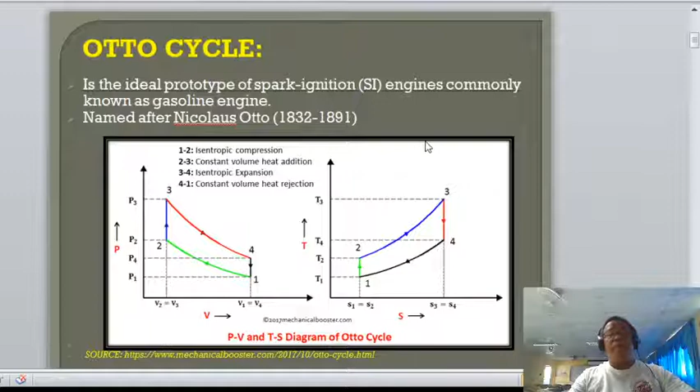Okay, let us now go to the analysis of the Otto cycle. If we consider the process involved between 1 and 2, that is isentropic, we'll notice that the equation for S equals C equals PV raised to K equals constant.

From the diagram, this PV raised to K equals constant can be written also as P sub 1, V sub 1 raised to K equals P sub 2, V sub 2 raised to K. Or rearranging the equation, P sub 2 over P sub 1 equals V sub 1 over V sub 2 raised to K.

But what is the term involved here for the ratio of V sub 1 and V sub 2? This is called the compression ratio, designated as RK. Substituting this RK into the above equation, we can easily determine the absolute pressure at the end of compression as a function of P sub 1, the absolute pressure at the suction condition, multiplied by the compression ratio raised to K, where K is the isentropic constant.

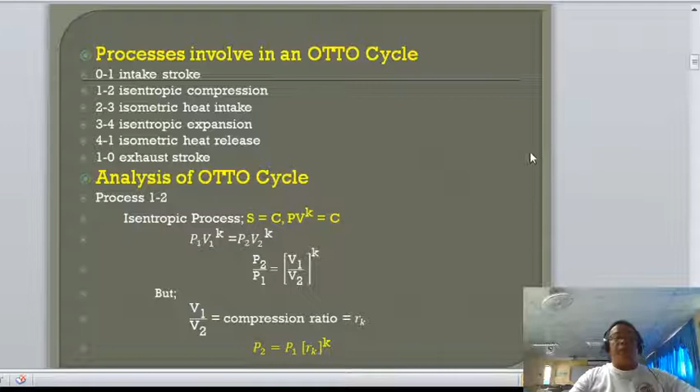Okay, so again, considering the ideal gas equation, or the combined ideal gas equation: P sub 1, V sub 1 over T sub 1 equals P sub 2, V sub 2 over T sub 2.

Getting now the value of V sub 1 over V sub 2, that is P sub 2 over P sub 1 times T sub 1 over T sub 2, and substituting from the original equation, we get the ratio of T sub 2 and T sub 1, that is T sub 2 over T sub 1 equals P2 over P1 raised to K minus 1 over K.

Another form for temperature in terms of compression ratio: T sub 2 over T sub 1 equals V sub 1 over V sub 2 raised to K minus 1, or simply T sub 2 equals T sub 1 multiplied by the compression ratio raised to K minus 1.

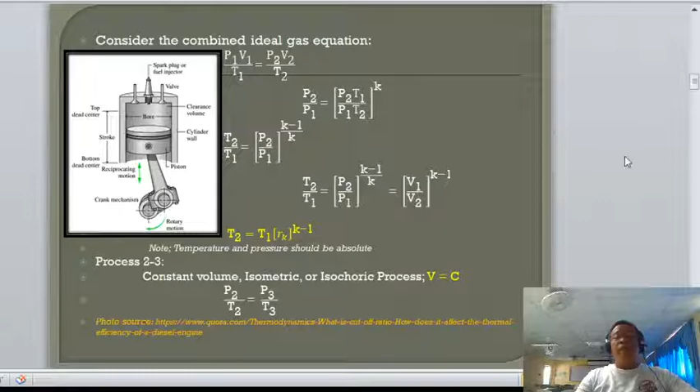So next is heat added. Heat addition will happen in 2 to 3. For constant volume, the heat added is defined as the mass multiplied by the specific heat at constant volume multiplied by the change in temperature between 2 and 3. Take note that the cycle utilizes air as a working substance. And for air, the specific heat at constant volume is 0.7186 kilojoules per kilogram Kelvin.

Next is for process 3 to 4. This is again an isentropic process, only that the gas now will expand, or the product of combustion will now expand from higher pressure at pressure 3 to pressure 4. So again this process is isentropic, wherein the general equation for isentropic is PV raised to K is equals to constant. Substituting from the above equation, P sub 3, V sub 3 raised to K is equals to P sub 4, V sub 4 raised to K. So rearranging the equation, P sub 3 over P sub 4 now is equals to RK raised to K. Or simply, the absolute pressure at 3 is equals to the absolute pressure at 4 multiplied by the compression ratio raised to the isentropic constant.

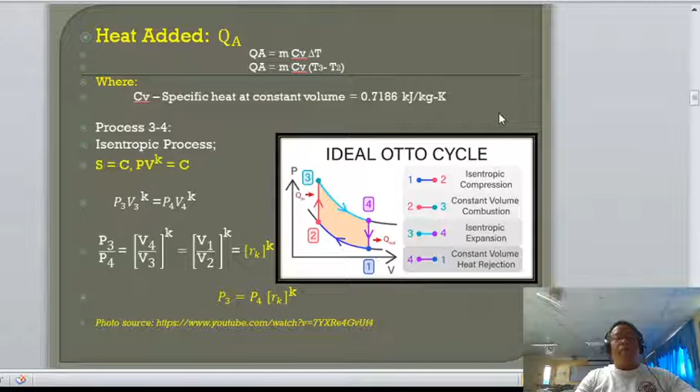So again, considering the combined ideal gas equation, P3V3 over T sub 3 equals to P4V4 over T sub 4. And getting the ratio of the highest temperature to the temperature at 4, T sub 3 becomes T sub 4 multiplied by RK raised to K minus 1. So this is somewhat the same as with T sub 2; the process of the derivation is the same.

Next is process 4 to 1. This process is again a constant volume process, where V is equals to constant. So simply using again the combined ideal gas equation and then eliminating the volume at 4 and 1, the remaining parameters now is equals to P sub 4 over T sub 4 is equals to P sub 1 over T sub 1. So in this process also, 4 to 1, heat is also rejected. The rejected heat now can be defined as the mass, the specific heat at constant volume, multiplied by the change in temperature between 4 and 1.

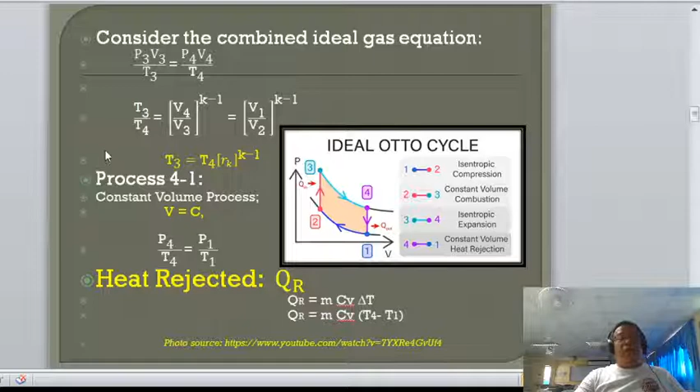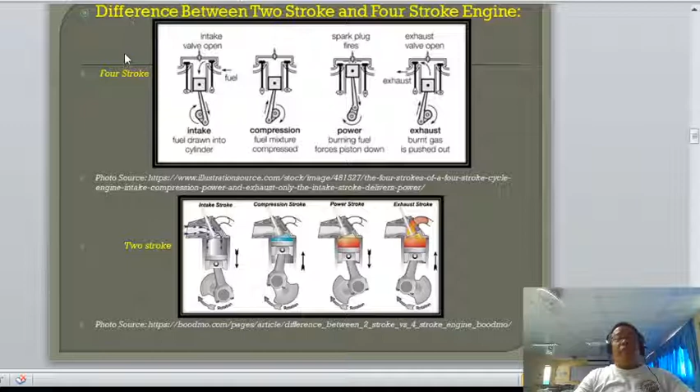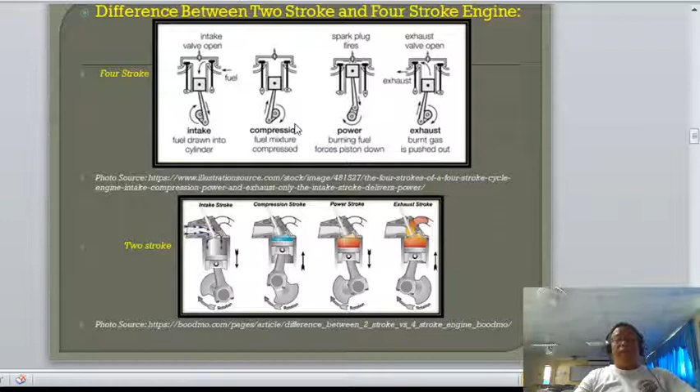So let us now consider the difference between the two-stroke and the four-stroke engine. We will notice that for a two-stroke engine, the cycle is completed in one revolution of the crank or flywheel. Take note that the cycle is completed in one revolution only. But for a four-stroke engine, the number of revolutions required to complete the cycle is 2 revolutions. So the cycle is completed after 2 revolutions. So that is the difference between the two.

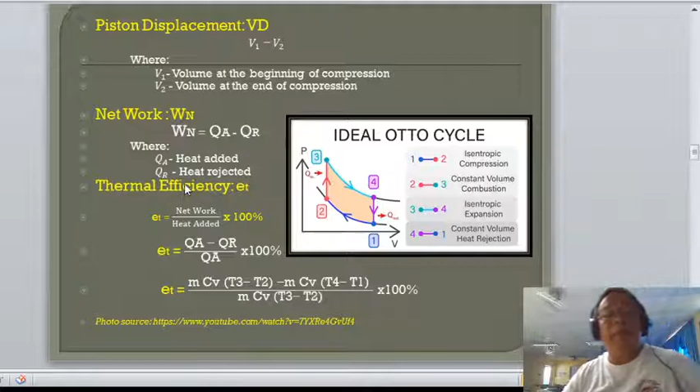Another, we have the so-called piston displacement. If we take a look at the PV diagram again, the difference between the volume at 1 and the volume at 2 is of course the so-called piston displacement.

Another is we have the so-called net work. This network is of course the difference between the heat added at point 2 to 3 and the heat rejected at 4 to 1. That is the net work or the useful work. Another is the so-called thermal efficiency. Thermal efficiency is the measure of how much of the energy input is useful or is utilized into useful work. So that is the ratio of the network and the heat added to the system.

So substituting from this original equation, the thermal efficiency now is equals to heat added minus heat rejected over heat added multiplied by 100%. Substituting the definition of QA at point 2 to 3: QA is mass multiplied by the specific heat at constant volume multiplied by the change in temperature between 3 and 2. Same as with QR, where QR is also equal to M multiplied by the specific heat at constant volume multiplied by the change in temperature between 4 and 1, divided by QA, which is MCv, T sub 3 minus T sub 2.

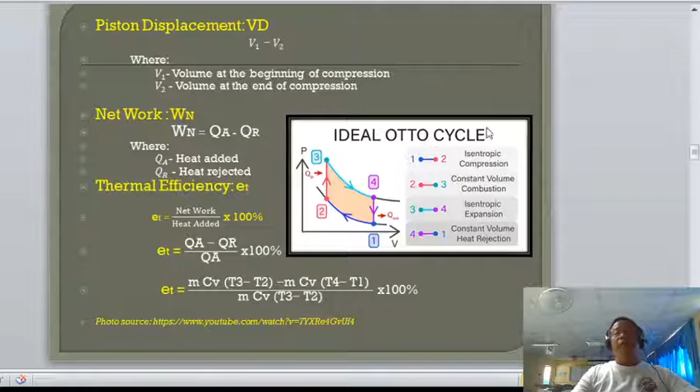So eliminating now mass and the specific heat at constant volume, that will now become: thermal efficiency is equals to T sub 3 minus T sub 2 minus T sub 4 minus T sub 1, over T sub 3 minus T sub 2. Or that is equal now to, considering that T sub 3 is equal to T sub 4 multiplied by Rk raised to K minus 1, and T sub 2 also is equal to T sub 1 multiplied by Rk raised to K minus 1.

Substituting now T sub 3 and T sub 2, the equation becomes: thermal efficiency equals 1 minus [(T sub 4 minus T sub 1) divided by (T sub 4 minus T sub 1) multiplied by Rk raised to K minus 1], eliminating the common terms. The final equation for thermal efficiency becomes 1 minus 1 over Rk raised to K minus 1. So we notice that the thermal efficiency of the Otto cycle is now only in terms of the compression ratio.

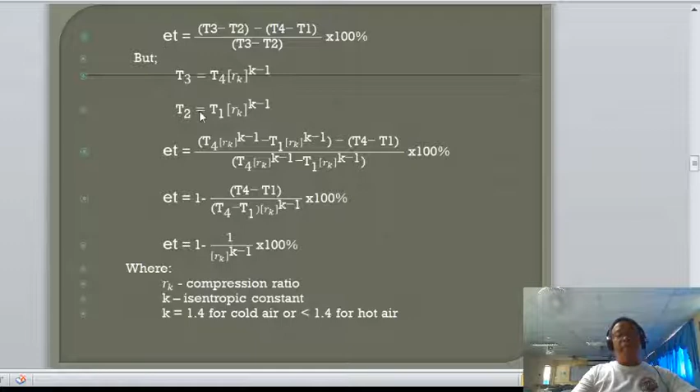We will notice here that the higher the compression ratio, the more efficient the cycle is. But take note that the compression ratio for an Otto cycle is limited only to about 8. So if the compression ratio is higher than 8, the cycle may become less efficient.

So let us now proceed to the network in terms of the initial pressure, volume, compression ratio, and pressure ratio. Knowing that the work or the network is the difference between the heat added and the heat rejected, for an isentropic process the work is at state 3, that is P3 V3 minus P4 V4, over K minus 1. This is for an isentropic process.

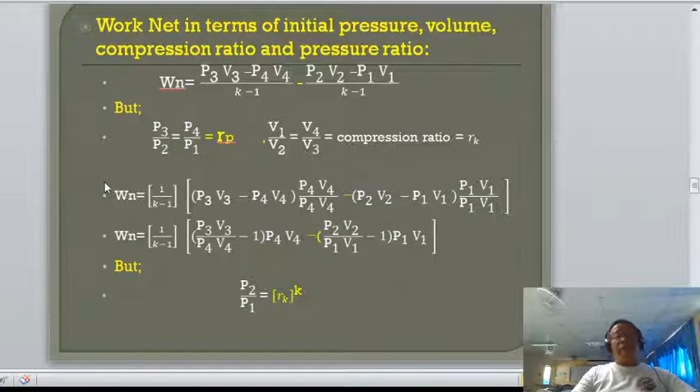Substituting now the pressure ratio and the compression ratio for the network, and eliminating those parameters which are not needed, we notice that the network in terms of pressure ratio, initial volume, initial pressure, and compression ratio is: Work net equals Rk raised to K minus 1, multiplied by V sub 1 over K minus 1, multiplied by the initial pressure, multiplied by the pressure ratio minus 1. I think it is clear to everybody.

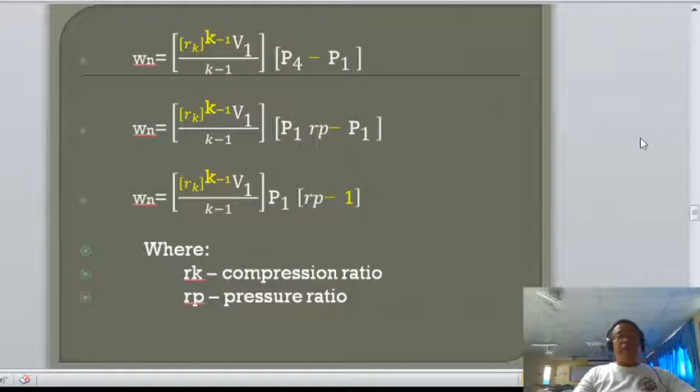Another expression defines the compression ratio in terms of the clearance volume. So, determining the compression ratio if clearance volume is given: Rk equals 1 plus C over C. Take note that C is the clearance volume.

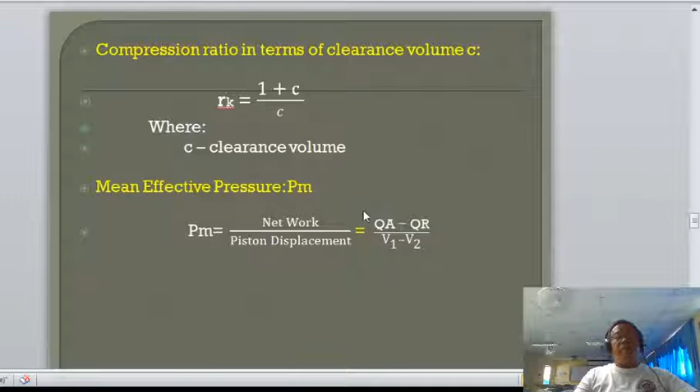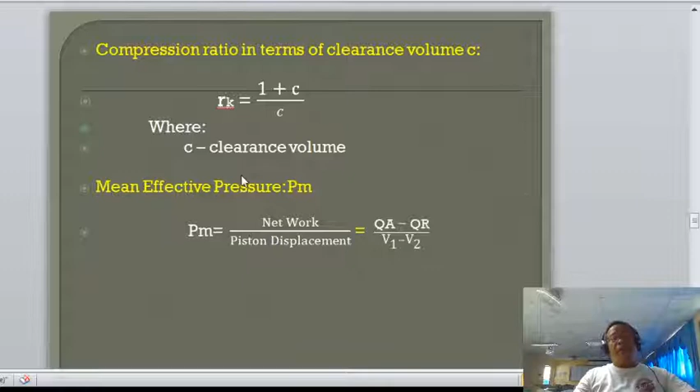Another is the so-called mean effective pressure. The mean effective pressure of the cycle of the engine is equal to the network divided by the piston displacement of the engine. Or simply, that is QA minus QR over V sub 1 minus V sub 2.

Let us now proceed to the example so that we can apply all those formulas. Let us consider this problem: In an Otto cycle, the pressure at the end of compression is 15 times that at the start. The temperature of air at the beginning of compression is 38 degrees Celsius, and the maximum temperature attained in the cycle is 1950 degrees Celsius. Determine: A) compression ratio, thermal efficiency of the cycle, and the work done. Let us take the isentropic constant for cold air as 1.4.

So how are we now going to determine the compression ratio? From the basic equation, we know that the compression is isentropic, so the equation is PV raised to K equals constant. Substituting now from 1 to 2: P sub 1, V sub 1 raised to K equals P sub 2, V sub 2 raised to K. Getting now the ratio of the pressures, that is equal to the compression ratio raised to K. Substituting all the values, the compression ratio becomes 6.9.

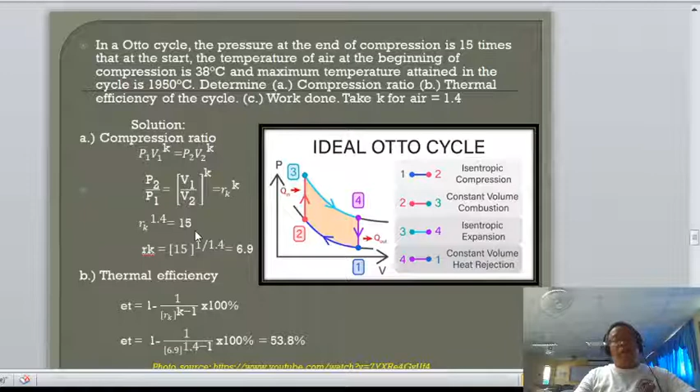Next is thermal efficiency. If the compression ratio is already known, we can easily substitute that compression ratio into the thermal efficiency formula. Substituting now 6.9 as the compression ratio, we notice that the thermal efficiency of the engine is 53.8%.

Another is the work done. The work done, of course, is the net work — the difference between the heat addition and the heat rejected in the system. So let us first define the temperature at the end of compression, since the highest temperature is already given. Substituting now from the equation, T sub 2 becomes 671.7 Kelvin.

Getting now also the value of T sub 4, T sub 4 equals 1029 Kelvin. Anyway, this T sub 4 is not needed anymore. We can also solve the heat added using the difference in temperature between 2 and 3, multiplied by the specific heat at constant volume. Substituting it now, the value of the heat added to the system is 1,115.3 kilojoules.